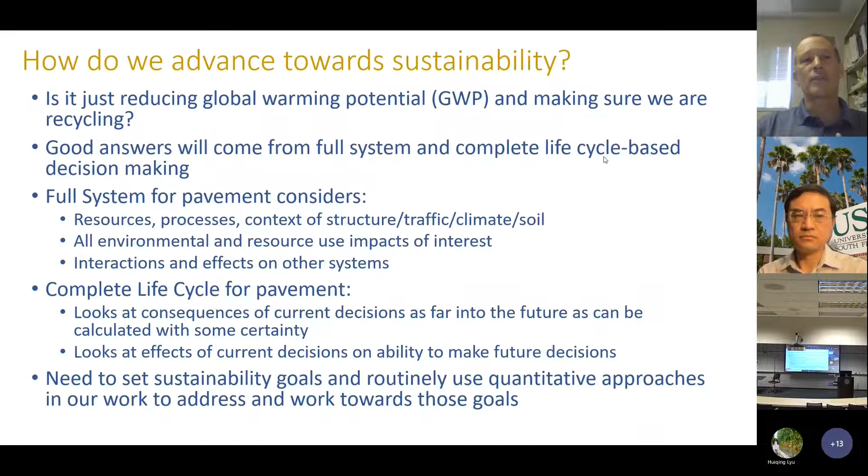But pavements, they're not as long-lived as bridges and dams and some buildings, but they are long-lived assets that we need to consider that full life cycle. And we need to look at the effects of our current decision on how much flexibility they give us to make future decisions. Now, the bottom line I would advocate is that we need to set sustainability goals, performance measures, performance goals, and then routinely use quantitative approaches in our work to address and work towards those goals.

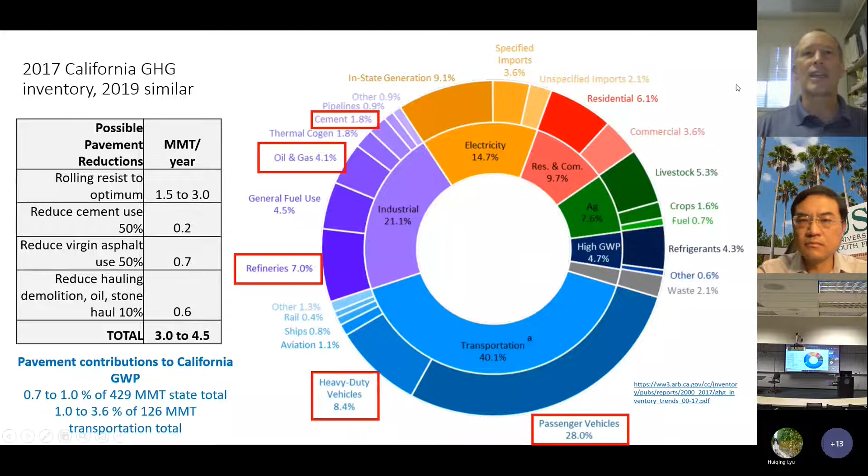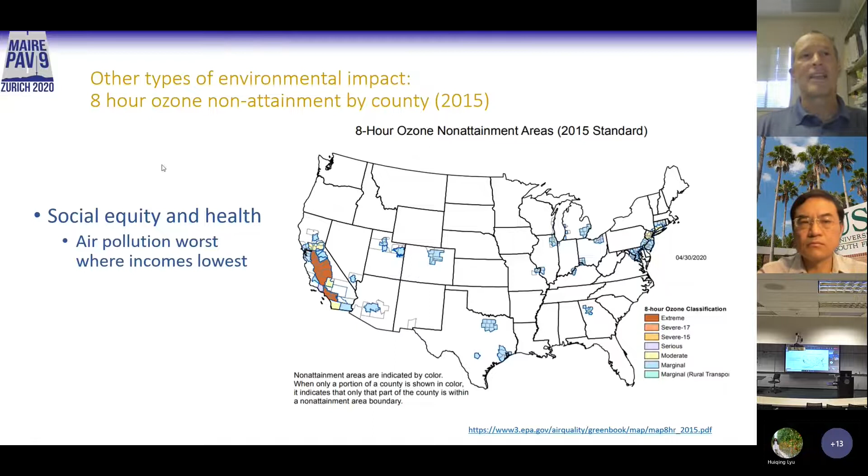Now, global warming is not the only thing. This is smog and ozone non-attainment for 2015, and guess where all the extreme and severe ground level ozone pollution is - primarily California. A big reason is that we emit here in the Bay Area and Los Angeles, and we have 12,000 foot mountains holding all of that in the Los Angeles basin, plus the Sierra Nevada holding it in the South Central Valley. Unfortunately, these areas are also among our most disadvantaged neighborhoods, and air pollution tends to be worse where incomes are lowest. I'll talk about that when I come back to social LCA.

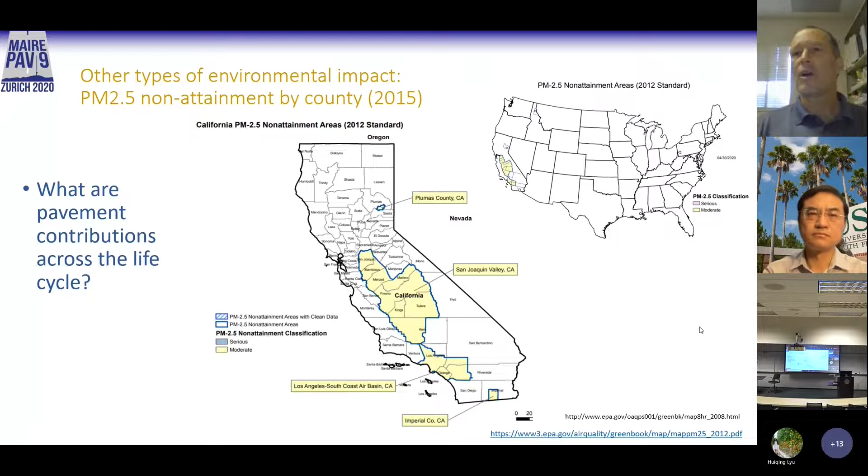So my point here is that in addition to global warming, we have some major other environmental impacts we need to care about. If you're in a different part of the country, you may have other types of impacts. This is the contextual part for when I get to life cycle assessment and setting your goals.

I want to point folks towards the Federal Highway Sustainable Pavements reference document. And you'll notice that this is called Towards Sustainable Pavement Systems. This is being clear and frank that we don't really know how to really have completely sustainable pavement systems yet. We need to keep moving towards that goal.

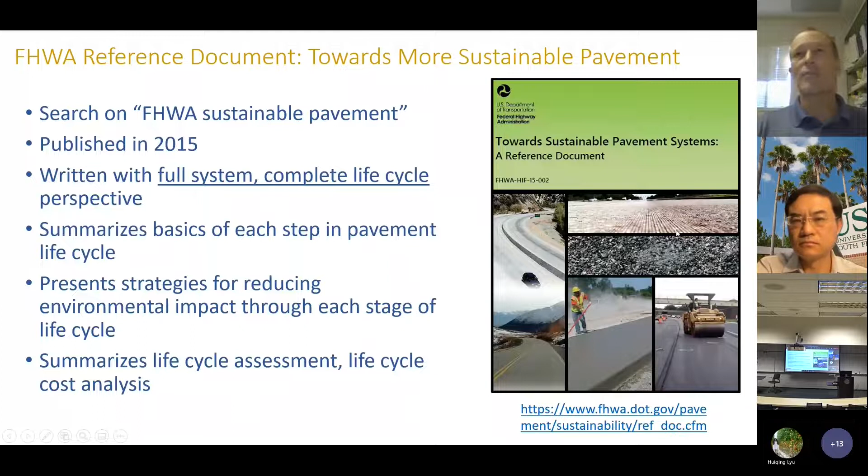This covers beginning to end of the pavement life cycle, complete system as we knew it in 2015. It's written in a life cycle. The chapters are through the life cycle, and it summarizes strategies, some of which I'm going to talk about today. And that's a free download from the Federal Highways website.

So thinking in terms of the pavement life cycle, I'm sorry, in terms of any product's life cycle, we have stages through the life cycle from left to right. Normally, most of the time, unless this is just a pure human service, we have raw material acquisition. And raw material acquisition, as well as the other stages, require materials and energy input. And often those are finite resources, which we want to track.

And then as a part of producing the product, we produce waste and we produce pollution, which we want to track. These are called flows. These are the input flows. These are the emission flows. And then as we move from stage to stage, we often have transport in between the different stages.

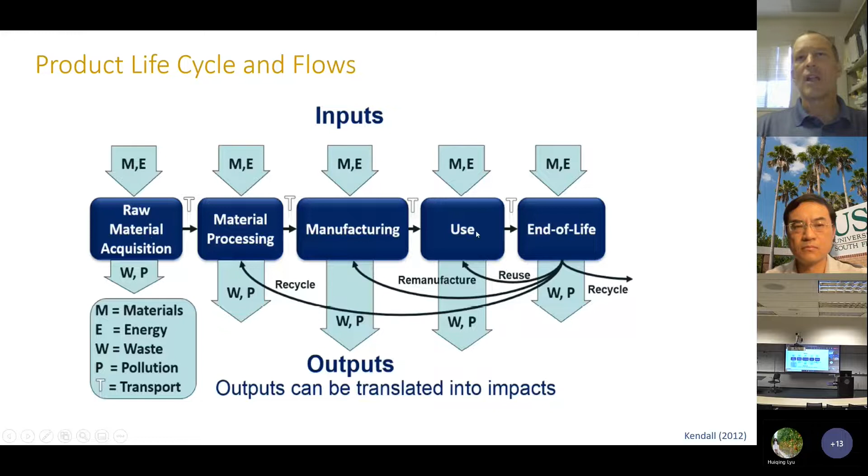So here we have materials acquisition, processing, manufacturing, use, and end of life. And then we have arrows going back through reuse, remanufacture, and recycling outside our own process stream. We also have recycling into our process stream from other process streams as well. So this is the basic life cycle. And each of these outputs in terms of waste and pollution can be translated into environmental impacts and life cycle assessment.

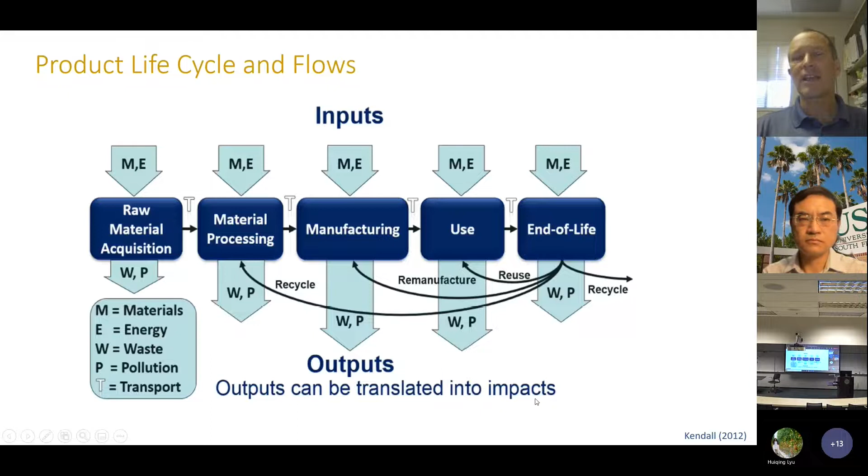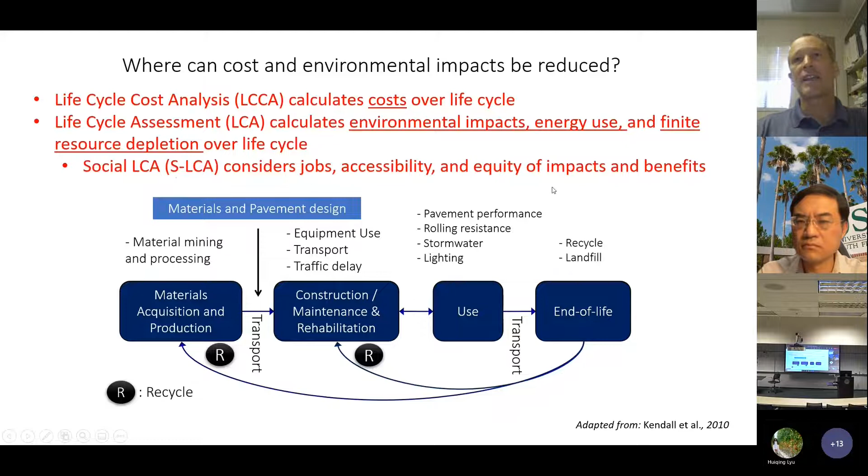So where can we reduce pavement impacts? We can reduce them throughout the life cycle: design, materials, construction, operations.

We can work in construction, and construction is often our biggest variable. If we get good construction quality control, we can double the life of the materials we've placed. And if we get bad construction quality control, we can have that life cut short. Many state DOTs, Florida DOT is out there in front in leadership on construction quality control.

But we need to remember that in many cases, in California, 50% of the pavement materials used every year are used by local government, who often don't have those kind of more sophisticated quality control systems. So we need to think about local government in this as well. Local government owns 80% of our lane miles. They spend about 40 to 50% of our pavement dollars.

Compaction of asphalt and smoothness of concrete and asphalt are amongst our most important properties that we get out of construction. We need to measure the quality. We need to enforce the specifications.

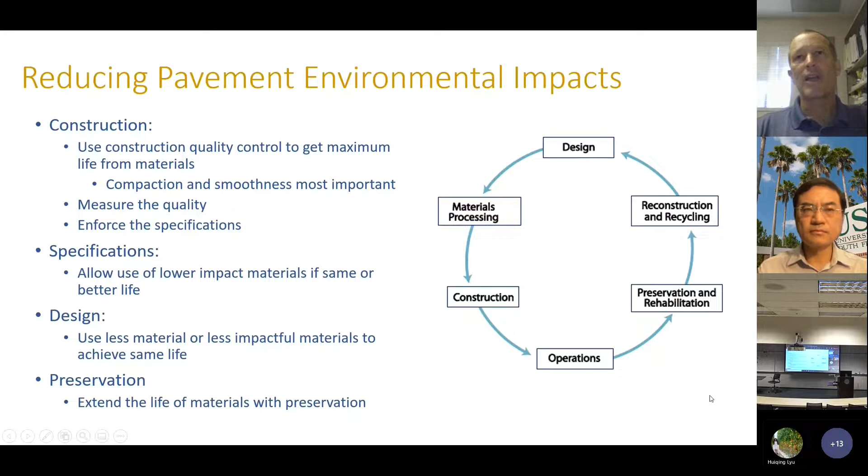So asset management is a major area where we can bring in life cycle assessment type goals. We've implemented global warming potential into Caltrans's pavement management system, and that allows them to do their 40-year look ahead of maintenance and rehabilitation for the entire state network, and also calculate and look at things they can do, such as optimizing smoothness in terms of triggering treatment to minimize air pollution and greenhouse gas.

So each time that we do a treatment, we get an orange arrow, a bump in emissions from materials, construction, transportation of materials, and demolition. In between, we have increasing roughness, and we have an increasing amount of interaction of the pavement with the vehicles: smoothness, viscoelasticity, and macro texture. And as the macro texture and smoothness get worse, we have increasing rates of environmental impact.

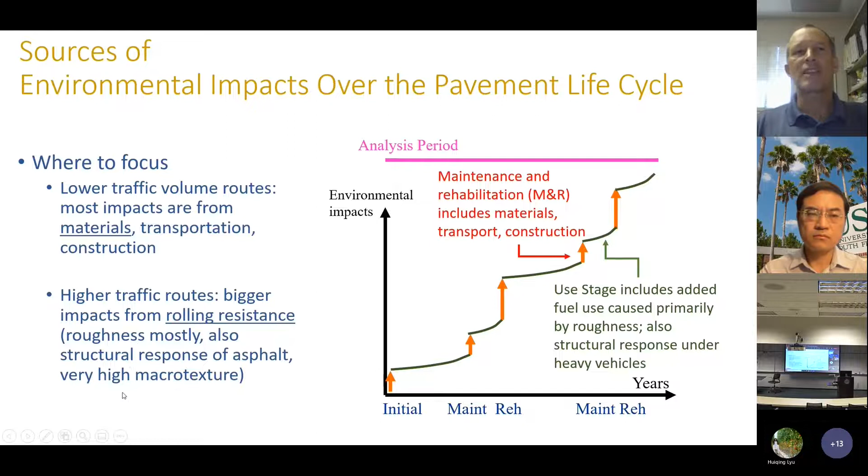On our lower traffic volume routes, where there's not that many vehicles using it, we really want to focus on the materials, the transportation, and the construction. On our higher traffic routes, where we have lots of vehicles interacting with that smoothness and rolling resistance, we want to focus on minimizing that rolling resistance, primarily roughness, but also structural response of the asphalt and the macro texture.

For all pavement, we want to make the same material last longer through good construction quality, so that we don't have to do so much maintenance and rehabilitation, and we extend that life with good construction quality and with preservation. And for high traffic construction, we particularly want pavements to be smooth from the start -- a pavement that's born rough only gets rougher. So getting good initial construction smoothness is very important, especially for those high traffic routes.

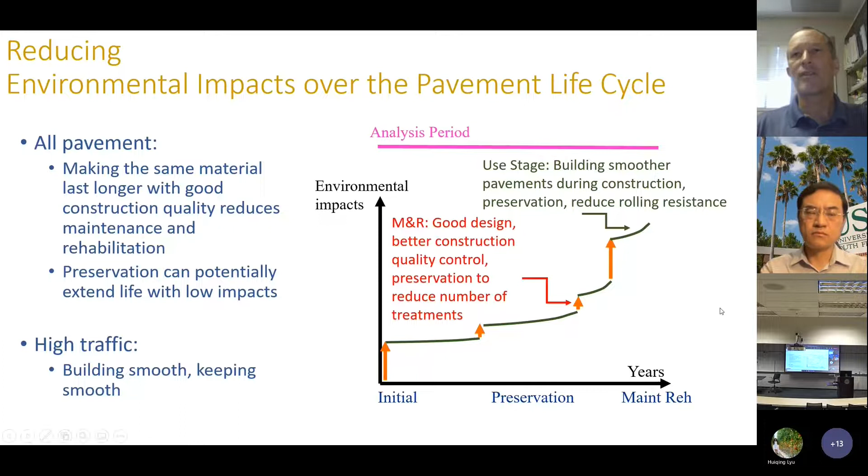I'm going to walk through an example or two for each stage of the life cycle. We'll start with materials. California and Florida are also what we call rubber states, tire rubber recycling states.

This is a comparison we did about 10 years ago, and we found through research that about 2¼ inches of rubberized gap graded mix gives us the same reflective cracking life as a thin overlay, as 3 inches of hot mix asphalt with 15% RAP. Now, this rubberized mix has more virgin binder, and virgin binder is about 40% of the global warming potential of an asphalt mix. So it's more impactful per ton, but because we can use less of it to get the same performance, we actually have a benefit in terms of global warming potential, these two giving us the same performance life of about 5 to 10 years, depending on the traffic.

And over here in an asphalt material, you can see where the impacts are. A small amount is the aggregate production. The asphalt binder production, which is the extraction and refining of the oil, is the green part.

The transport of materials typically accounts for 5 to 15% of emissions for any material. The other big one for asphalt is the amount of heating, natural gas that we use in the asphalt plant to heat the binder and the aggregate so that we can mix it. So the main sources in asphalt are binder production and heating.

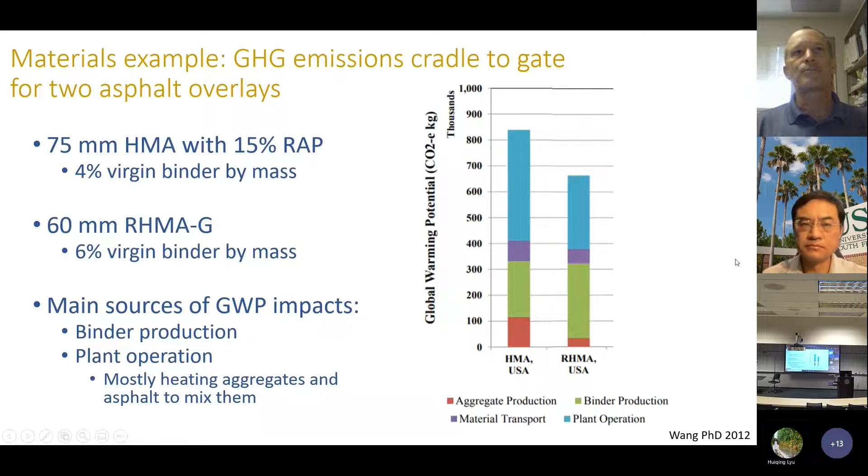Florida is a big user of SBS polymer, actually a big pioneer in the use of SBS polymer in surface mixes, with a lot of research by Florida DOT using the heavy vehicle simulator. Now, we know that if we add 3% SBS polymer, we increase the global warming potential of that mix by 18%. This is a very intensive additive, and this result comes from the Asphalt Institute life cycle assessment.

Now, the question is, does this mean we shouldn't use SBS? Well, no. If we can get more than an 18% increase in life, which Florida DOT has demonstrated compared to a conventional mix, then we actually have a net reduction in global warming potential and air pollution. So this is a reason why we don't want to just look at the initial impact—we want to look at the full system and the full life cycle.

With regard to recycled asphalt pavement, nationally about 90% of asphalt is recycled back into new asphalt. We're trying to push the amount of RAP that we use from 15%. In California, we're trying to get to 40% in the next couple of years.

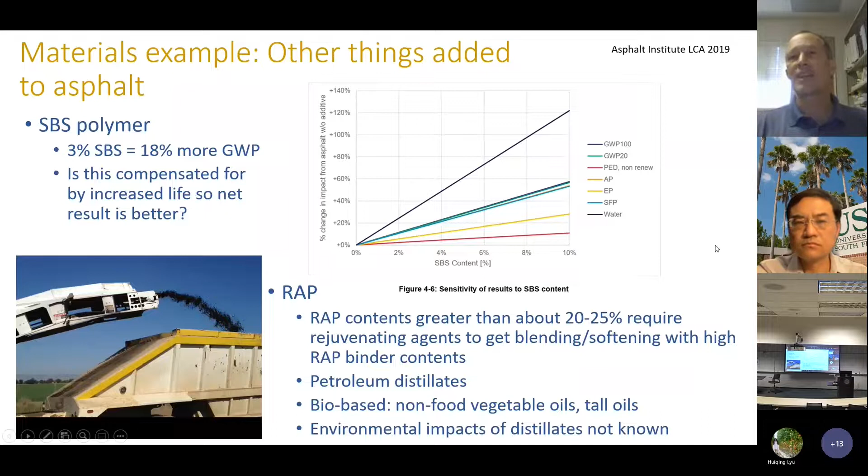But when we go higher, we have to add what are called rejuvenating agents to get that old hard binder to soften and blend. We have three choices for that: petroleum distillates, which are very impactful, and a couple of bio-based non-food vegetable oils and tall oils from pine trees. We're trying to work with these industries to get a better idea of these, but again, looking at the full system, we get a reduction in impact from using the RAP, but we need to also account for the increased impacts from the rejuvenating agents. Turning over to concrete...

Portland cement, hydraulic cement, is an incredibly carbon intensive process. I don't know if folks know where cement comes from, but it comes from mining limestone, aluminum ore, and some iron ore, and then burning those rocks at very intense temperatures, which is very energy intensive and carbon intensive.

That energy, that temperature, is used to drive the CO2 out of the calcium carbonate, and that's how cement is actually produced. So it's a double hit in carbon because of the energy as well as the CO2 coming out of the rocks. So the cement industry is under intense pressure to reduce that, and some of the paths are to reduce the amount of cement through better aggregate gradations.

California is a little late on this, but increasing the amount of ground limestone—Portland limestone cement—we found actually gives us better performance as well as reduced emissions. Other supplementary cementitious materials we're looking at include cellulose, nanofibers, and nanocrystals. These come from trees, and again, this helps us reduce our fuel load in our forests.

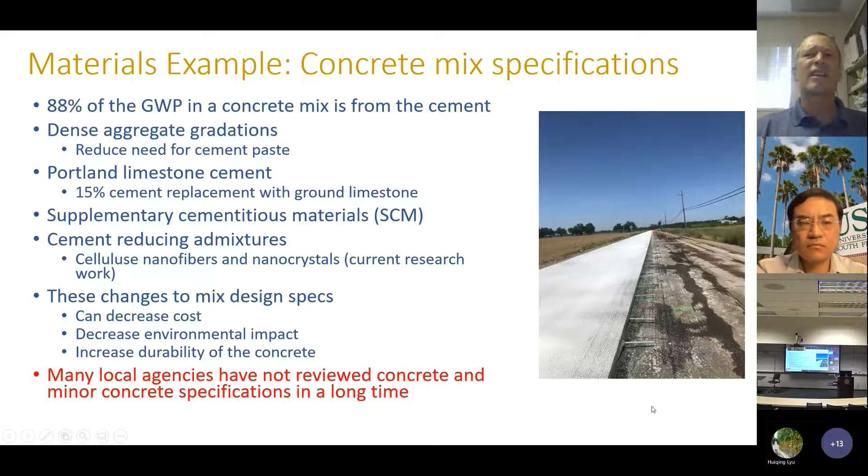Changes in design specs: one of the things that we found is a lot of local agencies have never reviewed their concrete specifications, and they're requiring things using technology and concepts from 20, 30 years ago.

An example in California: we looked at some concrete mixes from a city, and we looked at their urban street requirements and the mix designs they were getting, and they had this amount of CO2 per kilo of Portland cement concrete. Their playground mixes had this amount because they were not replacing cement with supplementary cementitious materials. We went out and looked at a typical mix, a mile away on the state highway carrying heavy vehicles, and they were using supplementary cementitious materials, and the state highway mix had this carbon intensity.

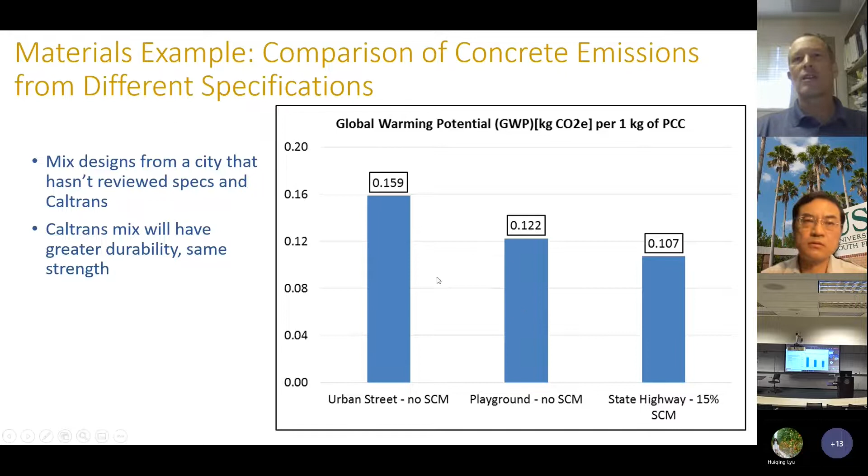Because the local government hadn't looked at their concrete specs and they were requiring minimum cement contents, they were far more carbon intensive. In fact, that extra cement was hurting them because they're at greater risk of drying shrinkage cracking. So they were getting worse performance, more cost, and greater environmental impact.

I won't walk through all of these. I'll just give an idea of some of the construction.

Now moving from materials to construction and transportation. There's a lot in how we put the work together. In heavy traffic areas, construction work zone traffic handling can increase emissions. We're modeling that and bringing it into our life cycle assessment now.

The equipment used in construction - I'm expecting that within 15 years we're going to have requirements in California that most of our construction equipment switches from diesel to electric. And as I mentioned, construction delay.

Construction quality - this is usually our biggest impact, not some magic bullet material or miracle carbon sequestration. The nuts and bolts, bread and butter, day-to-day nitty-gritty of construction quality is our most impactful place where we can make changes in pavement.

That means good compaction, making it smoother, good mix designs, and delivering the material that was specified. That requires less frequent treatments, less frequent construction, less pavement-vehicle interaction, and fewer social impacts. The public doesn't like it when every 3 years we're back out there with a construction work zone delay because our materials didn't last as long as we planned.

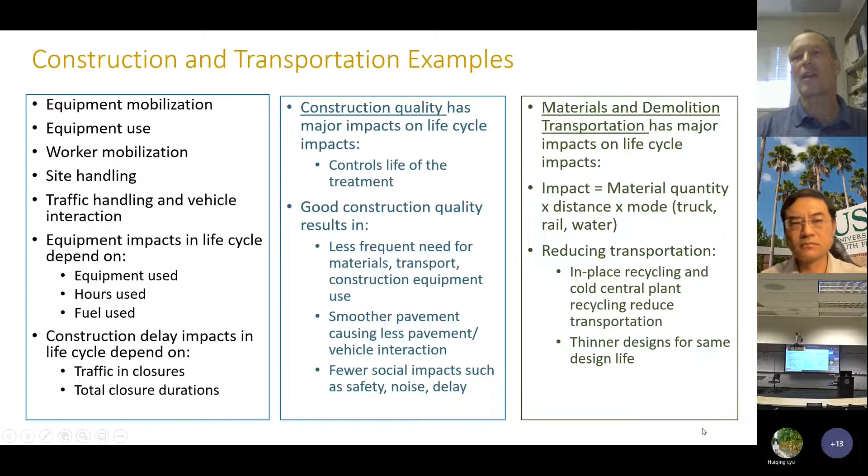Looking at the use stage now, there are 3 main areas of rolling resistance. Is this important? Well, rolling resistance can change the fuel use in an internal combustion engine by 0 to 8%.

This 0 would be our baseline - a very smooth pavement with no structural interaction, no viscoelastic energy loss, and a macro texture that's sufficient for skid resistance but not excessive. At 8%, every vehicle rolling down the road - 1%, 2% of every vehicle rolling down the road on a high volume road - is more carbon than all of the materials, all the transportation, and all the construction rolled up together. So this is a big deal, particularly on high volume routes.

So roughness - we measure this in terms of International Roughness Index. Basically what's happening is the vehicle is dissipating energy from the roughness through the shock absorbers and the tire sidewalls. It's converting mechanical energy into heat and then dissipating it out into the air. That affects all vehicles all the time.

Structural interaction dissipates energy through a viscoelastic time delay effect, or delayed elasticity, and asphalt is a viscoelastic material. This can affect up to about 4%. Appropriately looking at the stiffnesses of our materials in our pavements can help us with this.

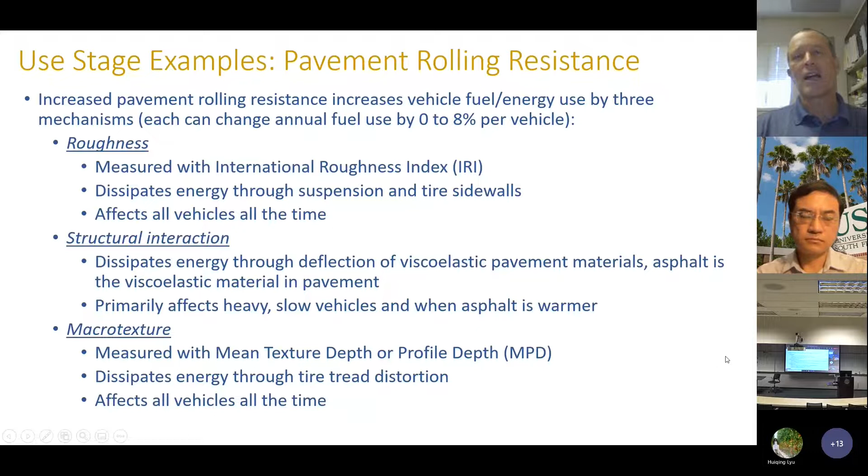Now, this is not that big a deal for light vehicles. This is not all vehicles all the time - this is primarily heavy vehicles moving slowly in warm temperatures. Macro texture is the surface texture of the pavement, and that dissipates energy through tire tread distortion. Typically not as important as either of these.

How important is this? This is International Roughness Index. Here's a 1 meter per kilometer, or 60 inches per mile, and that's our baseline. You can see some of the impact on cars, not that much - the different lines are for different traffic speeds, car speeds. Our current federal trigger baseline for going from a good pavement to a fair pavement is about a 3, and at 3 we're typically increasing vehicle fuel use and carbon emissions by about 5% for every car.

For trucks, much more sensitive to speed, and actually the impact is worse at slower speeds than at higher speeds. Again, when we're at that federal trigger, we're anywhere from about 2% up to about a 5% increase in the emissions, the fuel use and the emissions from trucks.

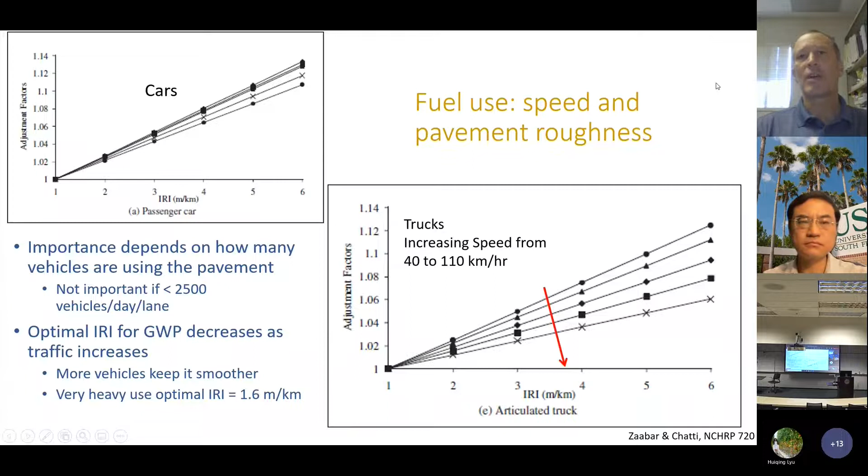Moving from use stage to end of life, this is where recycling is the big deal. We can use our materials back into the same materials - that's the highest use, it replaces virgin materials.

We can downgrade it to a less important material, send it to use as fill, or send it to the landfill. These are not good choices here. This is the best choice.

Now, nearly all existing pavement materials are perpetually recyclable in one form or another, and we can do that at the plant, or as shown in this photo. This is where we're taking an existing asphalt pavement that's badly cracked and grinding it up in place, injecting foamed asphalt and cement into it, then compacting it and putting a thin rubberized layer over the surface.

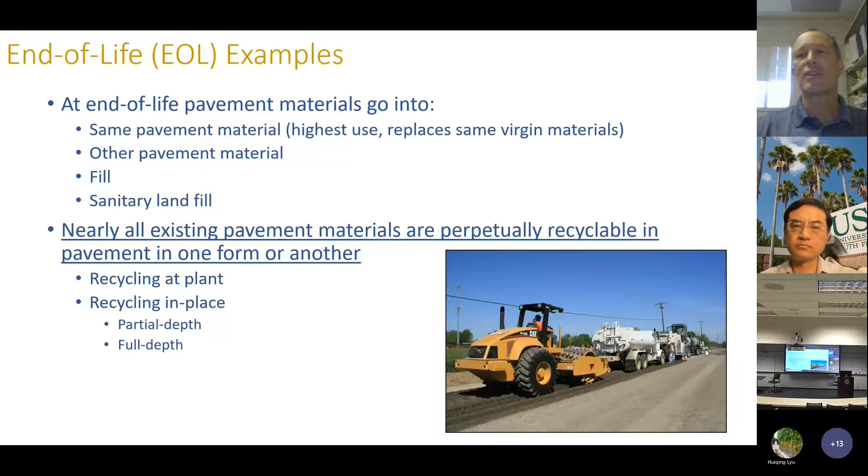And we've hauled in 95% less material than we would have if we'd removed and replaced this.

Lots of folks talk a lot about recycling other waste streams into paving materials. This is when I get media inquiries—this is about 50% of them. Sometimes these are somewhat viable, sometimes it's just kind of, well, it's just pavement. Why don't we just recycle the garbage into the pavement?

I would recommend not doing that without some really good care and life cycle cost analysis and life cycle assessment to see, is this really a good thing? The 4 questions we ask are: do we get the same performance or better? Do we get the same environmental impact or better? Do we get the same life cycle cost or better? And do we allow future recycling? Or does recycling this material into our pavement mean we can't recycle it in the future, because when we run it through the mixing plant we produce toxic fumes, or it just won't work technically?

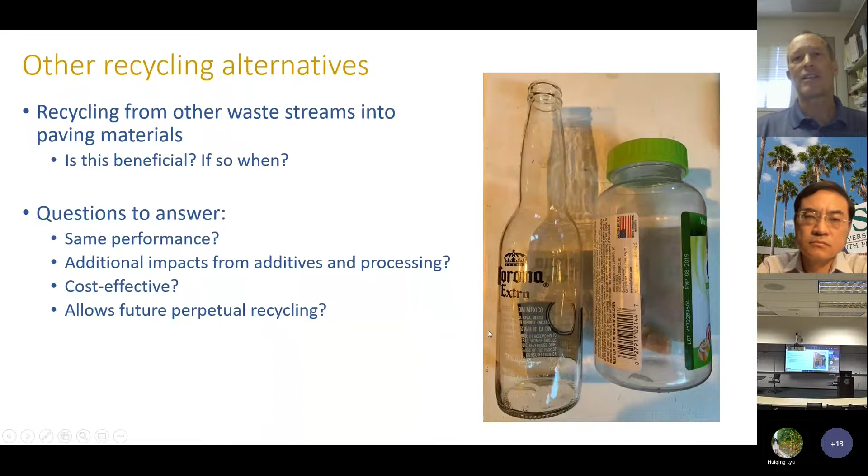So some of the initial takeaways—I have a bit more after this. For pavement, we can make contributions to improve the environment. Pavement has a very complex life cycle, many system interactions, many alternatives, and many trade-offs. All of us in the pavement enterprise need to innovate—engineers, asset managers, planners—many parts throughout the life cycle where we can innovate.

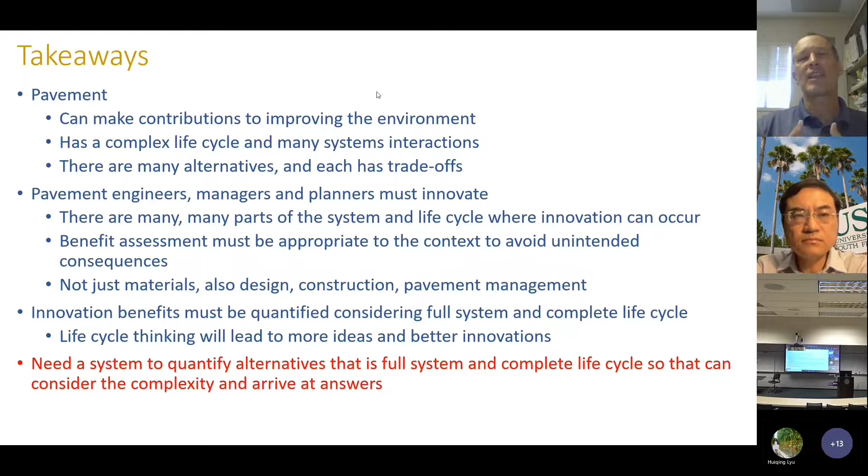We need to do the benefits assessment to avoid negative unintended consequences. And it's not just materials. Most of the focus in the public and in the media is on materials, but our biggest impacts, our most beneficial impacts, will come through design, construction, and pavement management changes.

We need to quantify these things. Again, I want to emphasize that we can really screw it up if we don't quantify and do some due diligence with our life cycle assessment and life cycle cost analysis, and look at the full system and complete life cycle. Thinking about the life cycle will lead us to better ideas and more ideas.

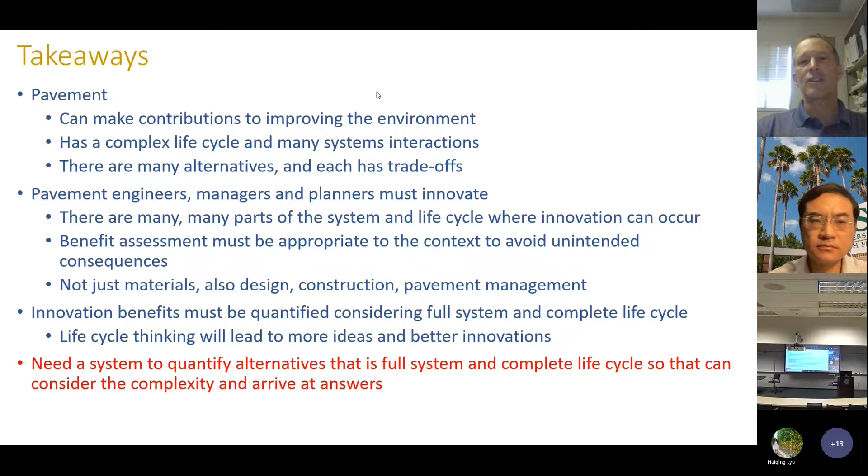The system to quantify these alternatives for the full system and complete life cycle that I'm going to advocate for is environmental life cycle assessment. Why? Because it's quantification—it has its issues, but it's the best approach we've got right now. It considers the full life cycle, and it considers everything within the system boundary, including important interactions and potential unintended consequences.

We actually have two types of LCA. We have attributional LCA, which considers that the market will not change—we're just going to alter the processes in the market. And we also have consequential LCA, where we bring in an innovation that's going to completely change the market, and the processes are not going to be the same—we're going to have actually different processes.

There's a number of LCA standards out there. Pavement LCA should follow these ISO standards. These are not regulations—there's no agency that regulates these. They're voluntary, and they only provide general guidance for all products, not detailed guidance for something like pavement. I want to note that these are not carbon footprints. Carbon footprints typically only consider the initial impacts, and I really want to advocate that we not just consider the initial impacts—we need the full life cycle.

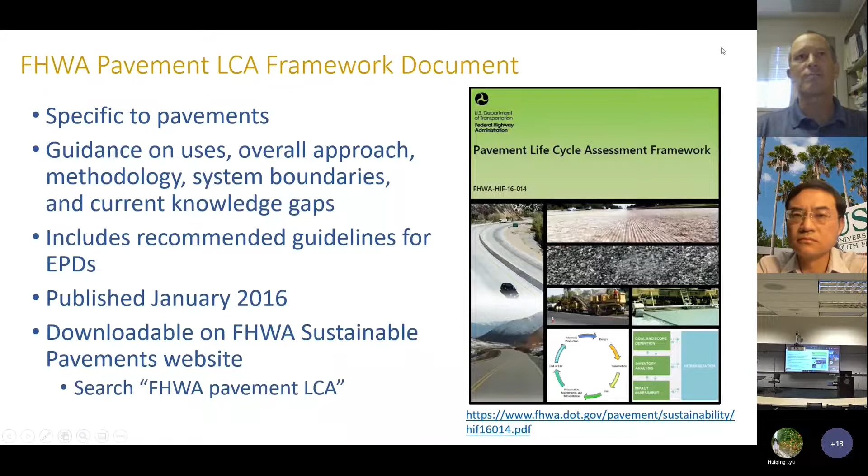For those of you who aren't familiar with life cycle assessment, the 5 steps are: goal definition and scope, where we define the questions we want to answer—these should be tied to our local sustainability goals—and we define the system we're going to analyze. Once we've got that, we do what I call the accounting stage, where we develop the quantitative flows of energy and materials into the process, and waste and pollution out of the process, per unit of product we actually want to produce. So this is where we do the flows—we inventory the flows.

We then have equations and models that convert those flows into impacts like global warming potential, ozone potential, PM 2.5 production—these are our impacts. We then interpret those impacts, looking at what they tell us and how we use them to answer the questions we posed in our goal statement. A critical part also is outside critical review. LCA really only stands up if people have faith in it, and faith in the results requires transparency and an outside critical review by all the stakeholders.

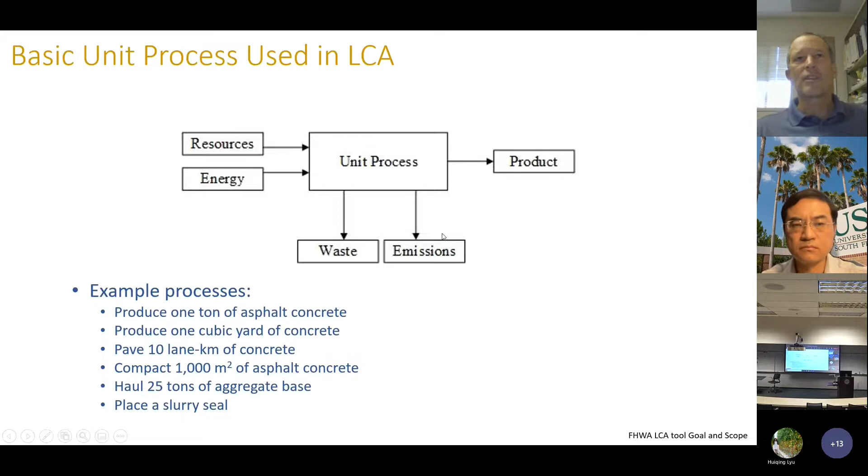Some example unit processes and defined units would be: we could model this for 1 ton of asphalt, 1 ton of concrete, 1 yard of concrete, 10 lane kilometers of concrete, or 1,000 square meters of asphalt concrete, and so on. This is done for each of our processes.

As we move through the processes of producing aggregate, and then the aggregate goes into the asphalt concrete, we do what's called balancing, so that the quantities are matched up to the proportional quantities of materials used to produce the final product. What's being proportioned there is the upstream materials extraction, the amount of electricity, fuel, etc. So balancing means scaling the input and output to the functional unit.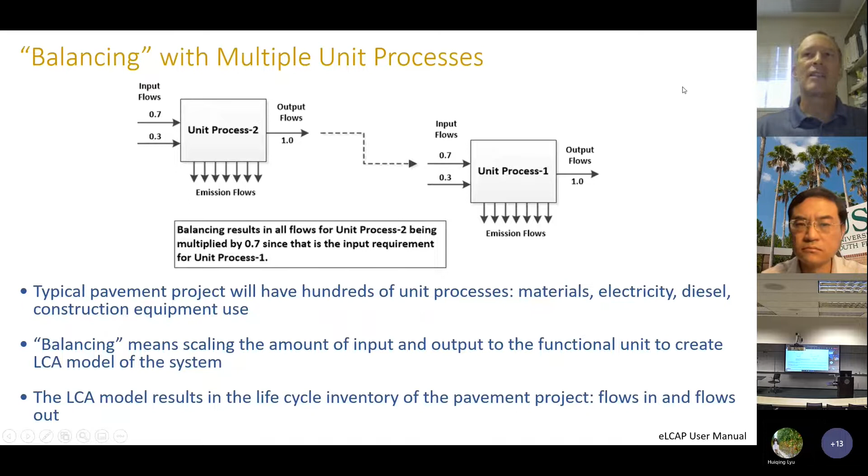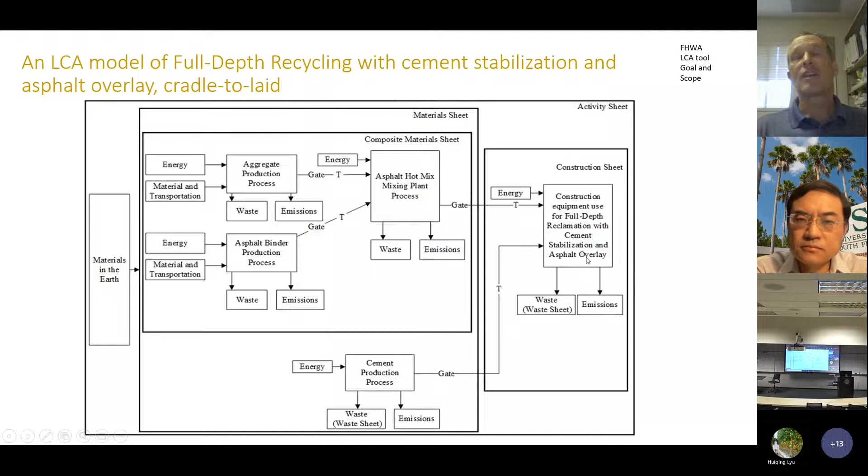When we do this for the full system, this gives us our LCA model. This is an example of a model for the initial construction of a full depth recycling of an asphalt pavement with cement. We can see materials extraction, aggregate, asphalt binder, mixing those, hauling them to the construction site, creating the cement that also goes into the mix, hauling that to the construction site, construction use - that's a model of that treatment.

So that's the inventory. We convert those into impacts - the flows get converted into impacts. We have primarily used in the United States the TRACI system from the US EPA. In Europe, they use the CML system. These are different. I primarily point to the TRACI system in the US.

These are the impact categories that come out of a typical LCA: different kinds of energy use, resource use, emissions, climate change, ozone layer depletion, and so on, toxicity, freshwater use, and hazardous and non-hazardous waste.

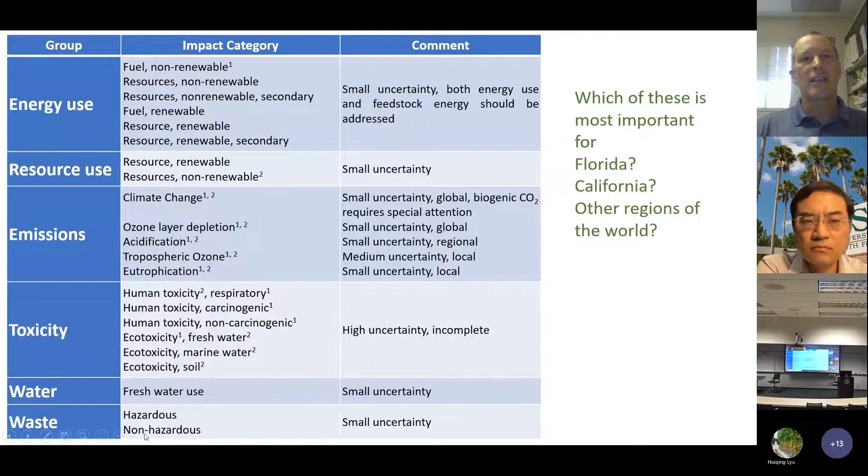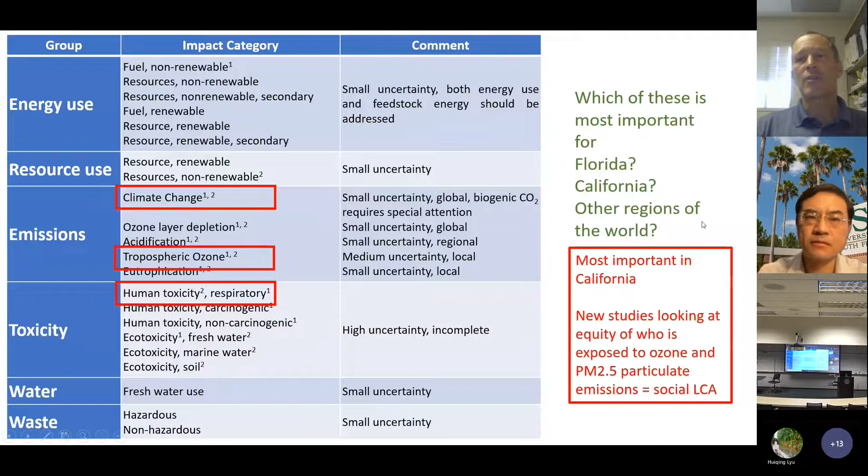These are the ones that are most important in California, the ones that give us the most problems. But this should be context specific - what are the most important in Florida? Probably somewhat different. The other thing we're starting to look at is the equity of who's exposed. Everybody's exposed to climate change, but ozone and toxicity are local, so who gets exposed to those is part of our social LCA.

To put together a tool to do LCA, I'll point back to the life cycle assessment framework: we need to define the system, define the processes, define the data to support the models, collect the data for the models, organize and validate the data, put the models together, produce a tool, and then we can go and do project level assessment, specifications, and policy.

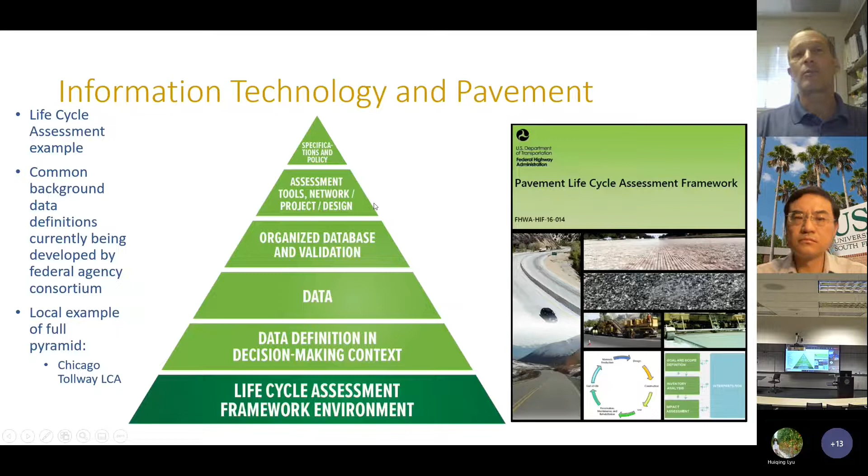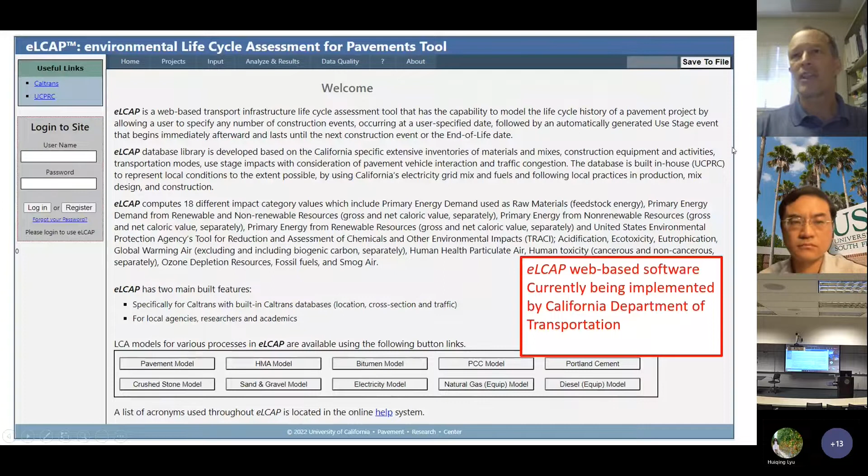We're making great strides in this, and there's a couple tools out there. Chicago Tollway tool was an early one. One that we're just rolling out in Caltrans right now is called eLCAP - it's a web-based tool and software currently being implemented by Caltrans. I also want to point to another tool which we helped put together for the Federal Highway Administration, a free download spreadsheet tool with national inventories called LCA Pave.

Got a couple minutes here - I'll give you a couple examples of things we can look at. High RAP mixes and preservation as two LCA questions we can answer. How much benefit do we get going to high RAP mixes versus our current RAP recycled asphalt pavement use? And does preservation - doing slurries and chip seals in between our overlays - reduce our global warming, or is it better to just let it fail and go do a rehab?

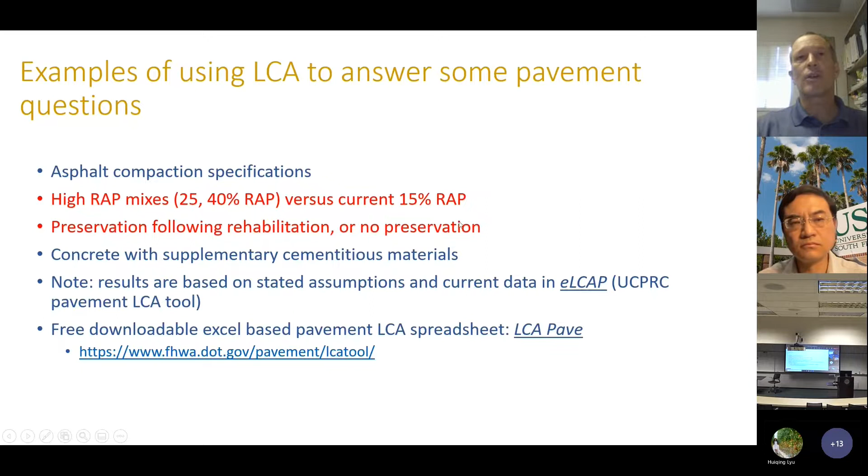We're using slurry seals for the preservation, and making some other assumptions. Key to this is: how long do our rehabs last without preservation? How long do our slurries extend the life of our rehabs?

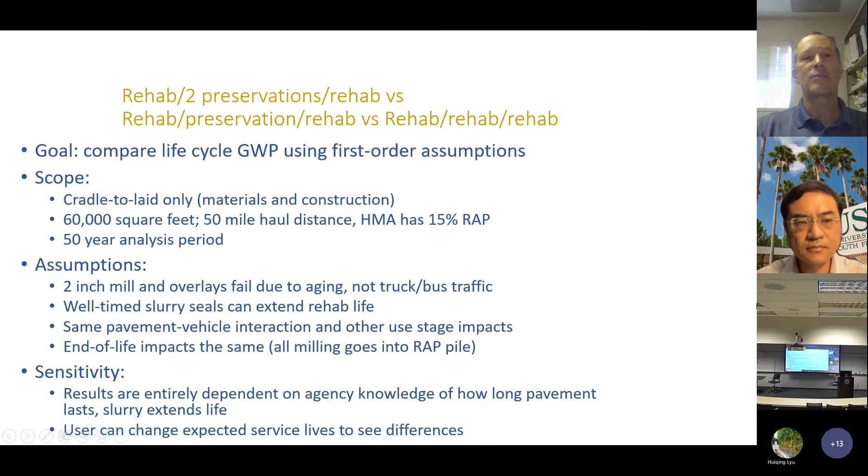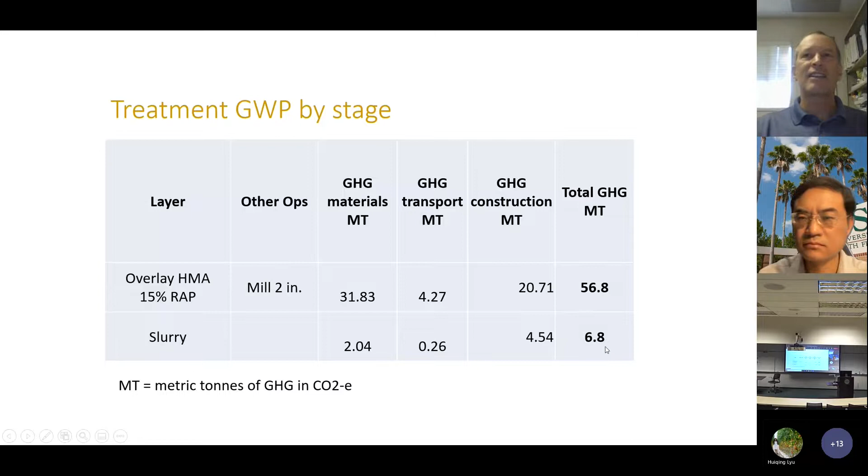Here's some of our treatment impacts. A slurry has this many metric tons, and an overlay, the 2-inch overlay, has this many. So you can see preservation is quite a bit lower per treatment, but the question is, does it really extend the life, or are we just adding greenhouse gases and not getting enough extension of life to get the investment back?

So a lot of numbers here, I'll let you look at these. The takeaway is that 2 preservations didn't look so good, because by the time we get to the 2nd preservation based on our pavement management system data, we're not getting so much extension of life. That actually was the 2nd highest. 1 preservation, we got bang for buck out of that. And just going to rehab, at least for our numbers and our performance, was the highest. So we did see a benefit of doing at least 1 preservation, and we saw some benefit of doing 2 preservations compared to just going to rehab.

If you have no heavy traffic, you may not need to do a rehab if you do preservation in a timely manner. And if you don't have heavy traffic that's going to fatigue that rehab, you can actually drop down to just doing a slurry every 6 years into perpetuity. We actually get down to 99 metric tons. So for residential streets, keeping on top of the preservation actually has a pretty big reduction, 50% reduction in global warming.

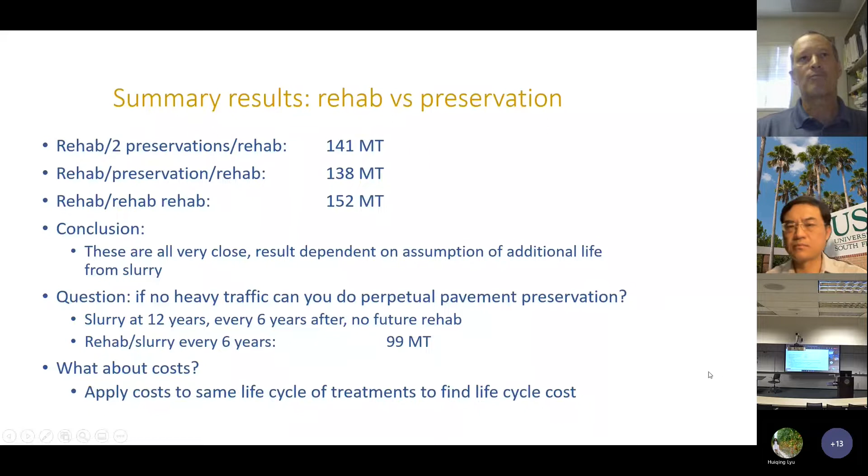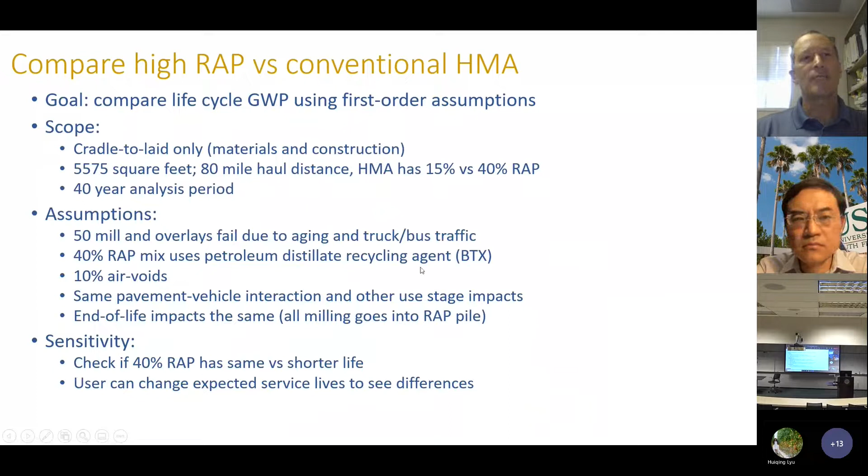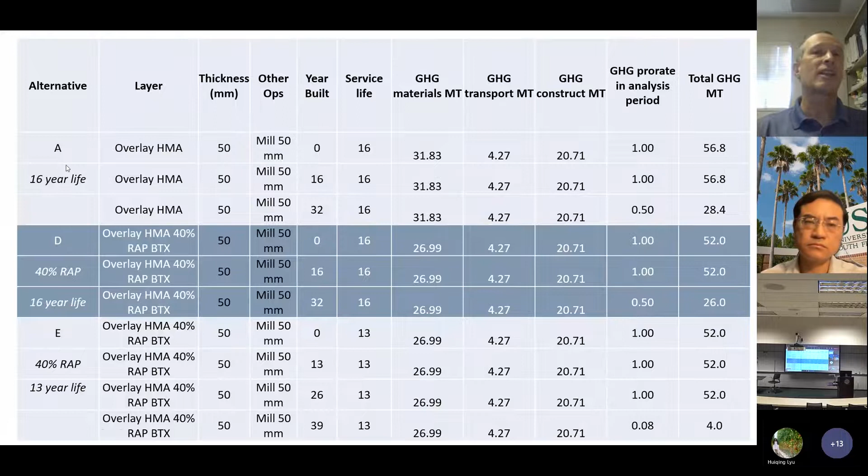High RAP versus conventional, there's the goal, there's the scope. We're looking at 40% RAP and the petroleum distillate recycling agent, and a lot of numbers. We also looked at whether we get the same life with the high RAP, or if we don't get as good a life with the high RAP. And when we look at the results, if we're getting a 16-year life out of that 2-inch overlay, and we are getting the same life out of that, it gives us about an 8% reduction in global warming.

Why is it not a 25% reduction? Well, part of it's because of that very carbon-intensive rejuvenating agent, and part of it is that we have to heat the aggregate hotter when we use the high RAP. If that RAP shortens the life by 3 years, we actually produce more global warming potential from using high RAP. And so this is why we have to answer all 3 of those questions: performance, cost, life cycle cost, and life cycle assessment. Recycling isn't always the better alternative if we're not getting same or better life.

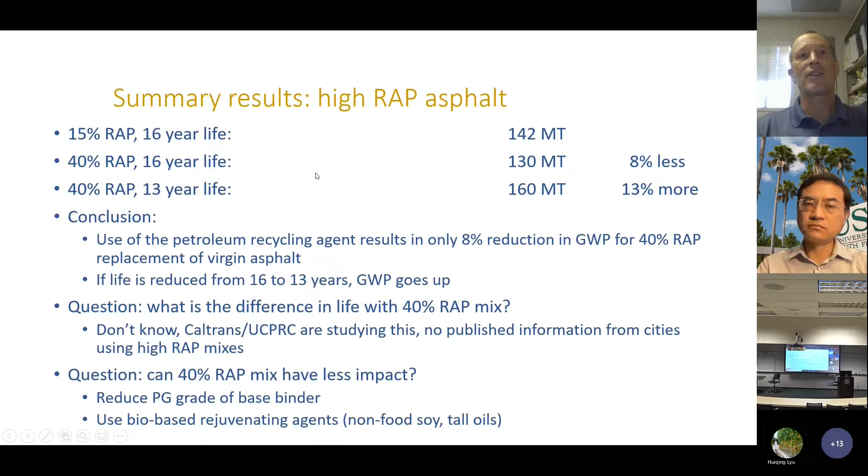I want to mention environmental product declarations. These are basically like a cereal box of emissions from life cycle assessment, cradle to gate, for a material. These are required in California. For some materials, they're going to probably be required for asphalt and concrete. We're collecting them through state specification right now.

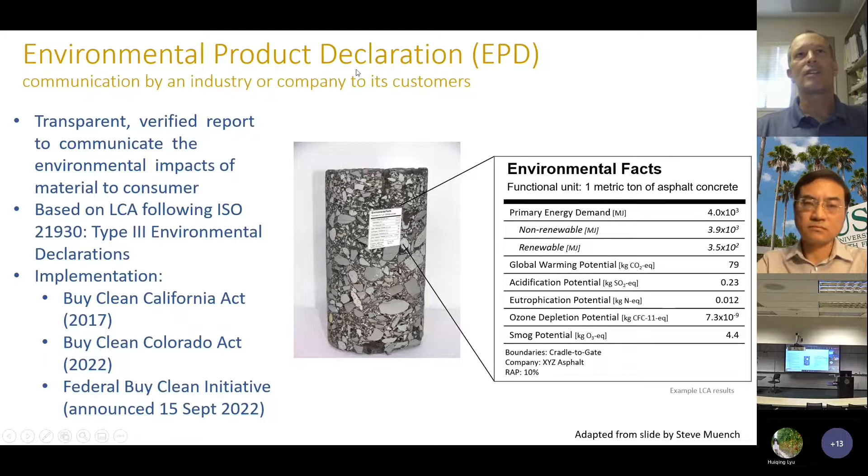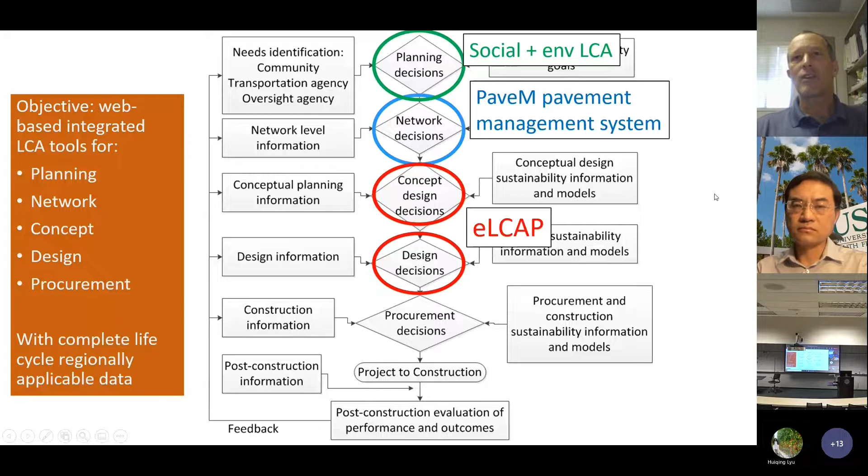Where can we use LCA? We can use it in the planning stage when we include the social. We can use it in asset management. We can use it in conceptual and final design. And then we can use EPDs during procurement and construction, which is also LCA.

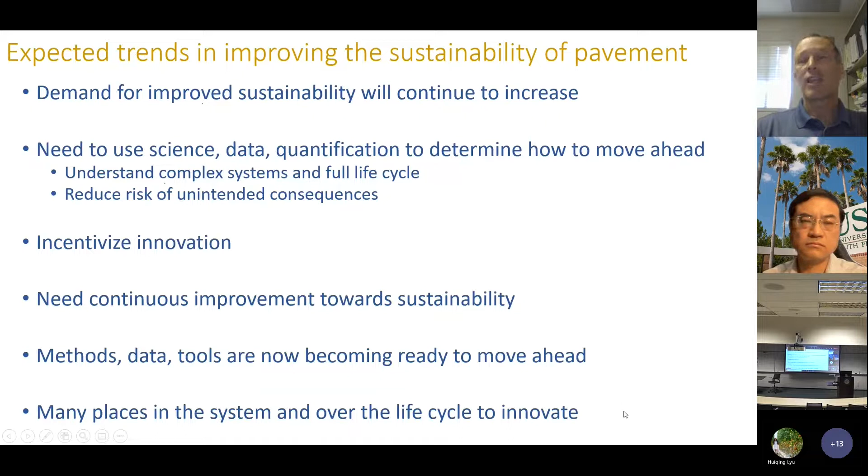So we expect all of these trends to continue: the need for improved sustainability, the need to use science, data, and quantification to figure out and set performance goals and see how we're doing, to reduce the risk of unintended consequences. We want to start to incentivize this type of innovation, be less prescriptive, and set performance goals rather than dictate methods. We need continuous improvement, and we need methods and tools to move ahead, and there's lots of places where we can do this.

Last thing is, one other thing we're working on is how do we prioritize which strategies we should follow. We've gone to something called the supply curve, or a marginal abatement curve. What this is, we use life cycle assessment to look at different strategies. Each of these boxes is a strategy, and we use life cycle assessment to see how far each strategy advances us towards our goal. But we also use life cycle cost analysis to figure out a bang for the buck metric: how much does it cost or does it save per ton of emissions reduced?

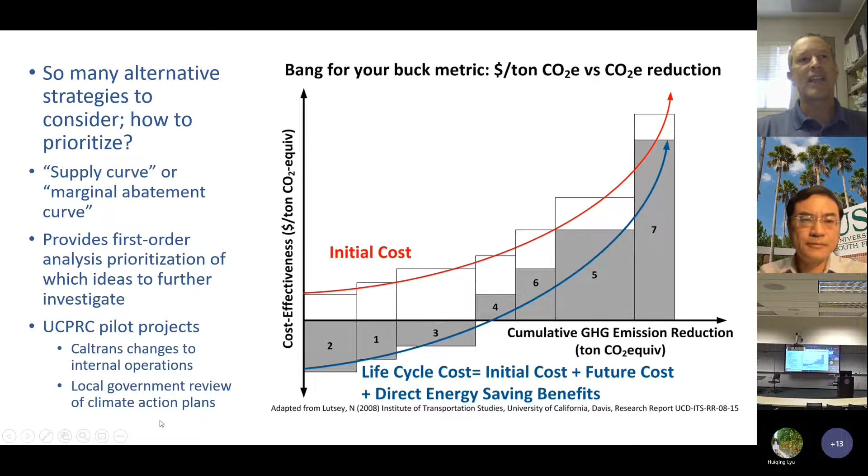And then we put these in rank order, and those that are less than 0, that means we reduce the environmental impact and we reduce life cycle cost. We should be doing these yesterday. And then we can prioritize so that with the dollars that we have, we can get the maximum bang for the buck. This has been applied to Caltrans, and we've also looked at climate action plans by our local governments.

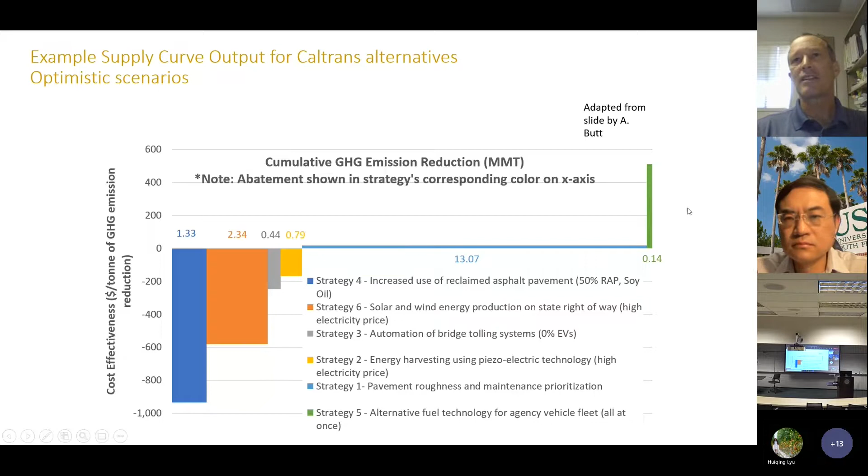This is an application done with different strategies that Caltrans was considering: use of RAP, renewable energy production in the right-of-way, energy harvesting, optimizing pavement roughness, and so on. This was our optimistic supply curve, and we did a sensitivity analysis showing a different curve with pessimistic assumptions.

The last thing we found, or the state has found, is that in the 20% of neighborhoods with the least pollution burden, those tend to be more advantaged and have fewer people of color. The 20% most polluted neighborhoods tend to be overwhelmingly populated by people of color and poorer people. So our goal is to start considering this and try to deal with some of this inequity.

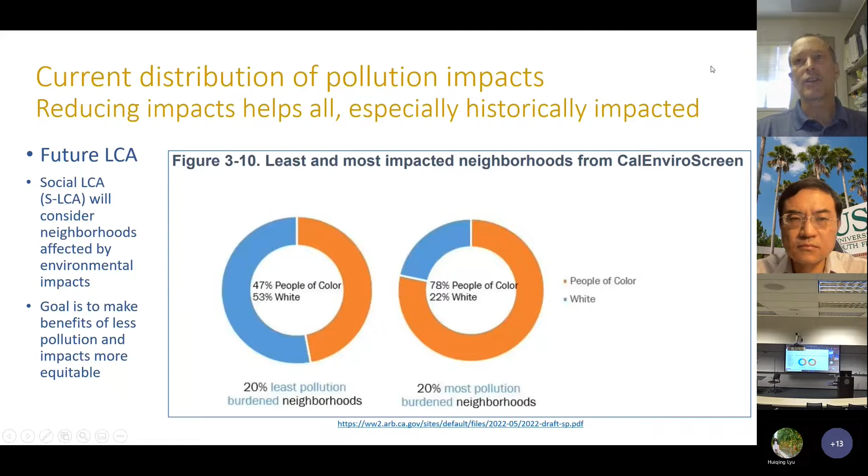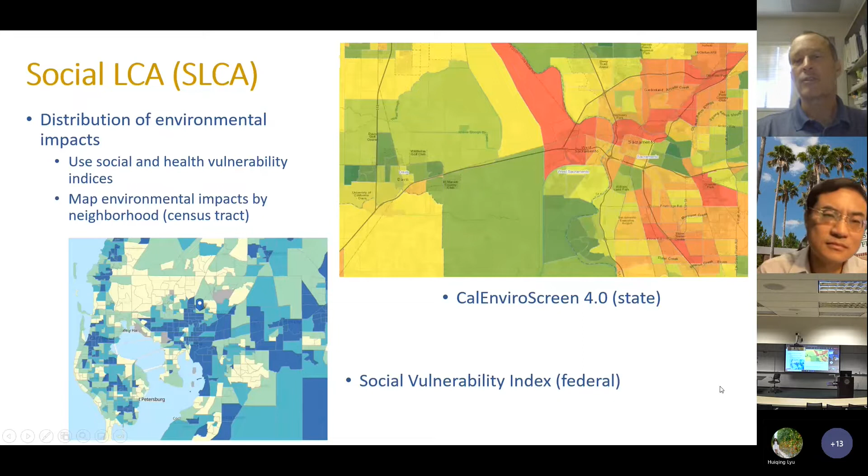We're using a tool called CalEnviroscreen, at the neighborhood or census tract level. This is Davis, which is pretty well off, and these are some of the poorer neighborhoods in Sacramento. We're looking at where emissions occur. At the federal level, this is Tampa, and there's USF right there—darker areas are less advantaged. There's a federal social vulnerability index that can be used to map impacts as well, and these are some of the social impacts.

I'm going to wrap up here. I'm over time, so I'll leave these for another time.

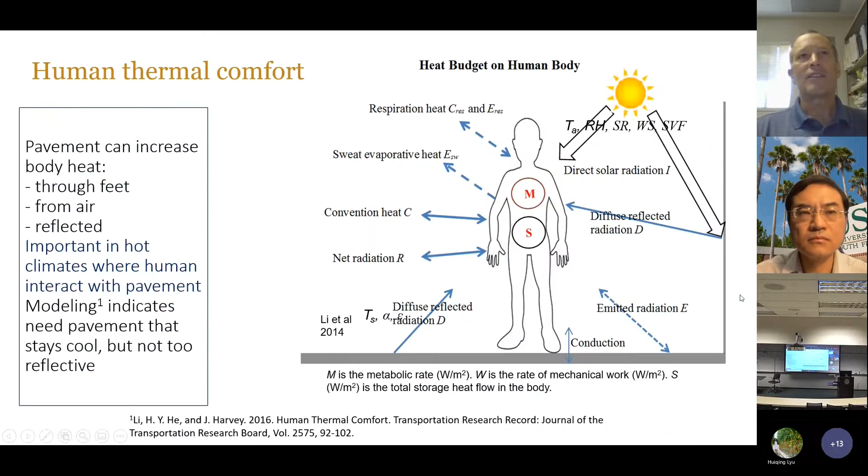He got four feet from my face and said, listen son, what are you going to tell your grandchildren? What have you done to help solve these problems? If you say, well, I just did my job and I wasn't that concerned about it, are you going to be able to look your children and grandchildren in the face?

The other thing is, we're no longer a rich enough country to make a whole bunch of mistakes and fix it a couple times. We've got to get it right, or pretty right, the first time. I'll leave you with a YouTube video of him.

I would add, we've got to focus our research and translate our results into practice, really communicate what we're doing, and get feedback and criticism as we do it. Thank you, and sorry I went a little bit over on time.